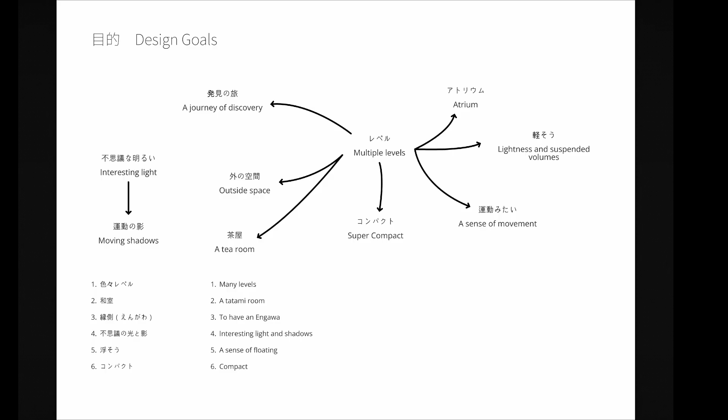As I said before, the atmosphere has a lot to do with light and how shadows dance in the daylight. Particularly, this was a forested site, so I thought it'd be interesting to see how light comes through the tree canopy in the komorebi, and how the movement of trees and leaves would dance shadows and light into the interior.

The narrative of discovery within the architecture is that you would come in and there are three distinct views, similar to Natsumi-chan's house, but in a different order. You would come in and be taken through a series of progressive views to Enoshima Island, Mount Fuji, and then the ocean to the south. As you climb your way up through the building, you would be exposed to these views - they would reveal themselves to you.

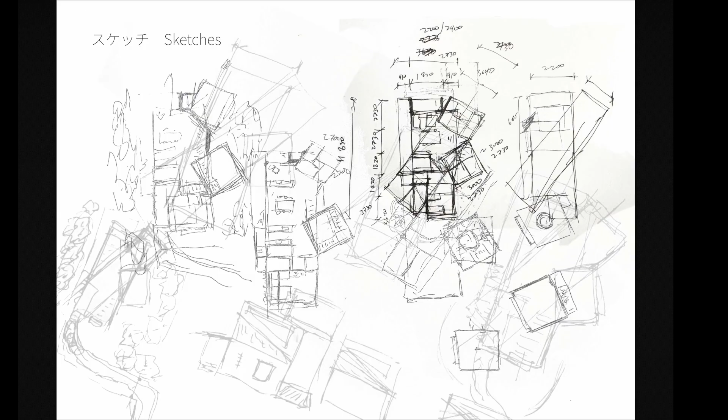So I did a lot of sketching to begin with. I try to start all my projects with hand sketching, both in plan and section, just drawing out ideas. I think I could do a better job at bubble diagramming - I've never really found it useful, and I don't know if it's because I already have an idea in my mind of hierarchy, but I kind of skip that step. I'm not sure if that's good or bad, but a lot of my sketching tends to be specific to plans and sections, and then my imagination handles the 3 dimensions.

So in terms of place, this is again in Enoshima, just south of Tokyo. It is my favorite place in Japan because it is right beside the ocean. You have Enoshima Island, which is a great place to visit, and you have Mount Fuji in the distance, which on a clear day is spectacular.

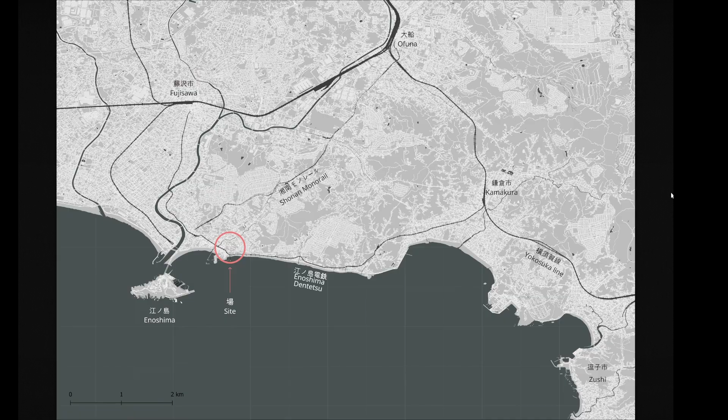So this is the site location. Natsumi-chan's house from the previous video is just down here, right near Enoshima, and along the Enoshima Dentetsu Railway to Kamakura, which is kind of the famous tourist railway, and a great train ride nonetheless.

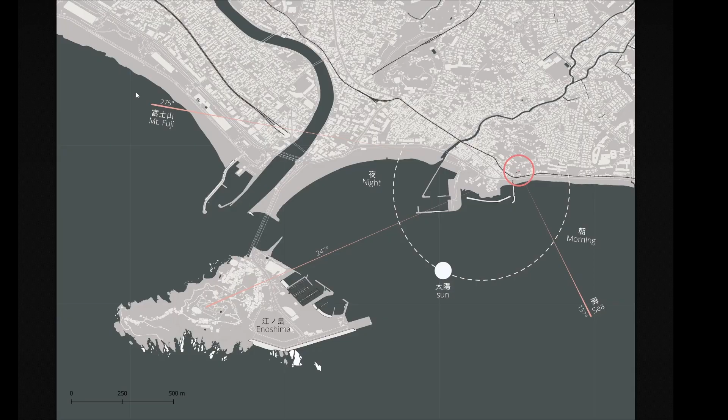From this site, kind of slightly up on the hillside, there are three vectors: one to Enoshima, one slightly up from west to Mount Fuji, and then to the southeast towards the sea.

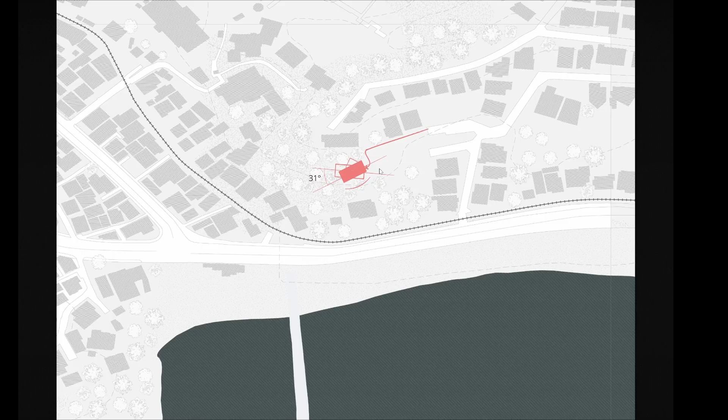This is kind of where the site is. The main road's down here with the railway line, and you go up maybe 40 meters or so from sea level to be on the edge of the hillside. Kind of right here, Natsumi-chan's house in the previous video was there. Enoshima's here, and Mount Fuji is there.

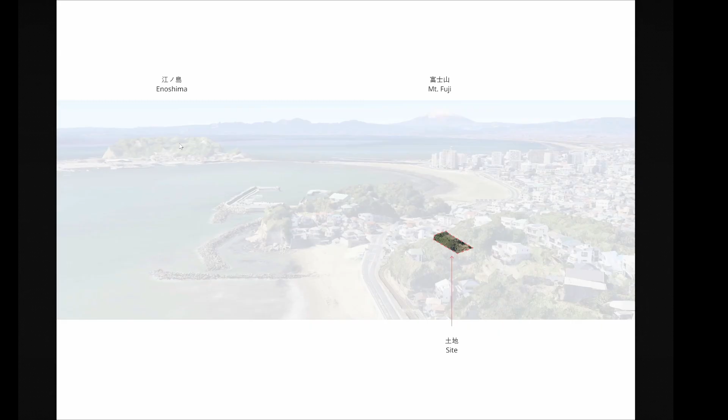Right now it seems like there's an abandoned house there, and so I kind of picked this site as a potentially viable location. There's a bit of a terrace stepping that goes along here, where you terrace up from the beach to the road, and then up to this first house, again up to the property, and then a third time up to a house that's slightly higher up.

In terms of journey, again we're looking at movement and tatamis and different materials, a change in material aspect as you go through the architecture, and how those materials kind of lead you towards the three views.

It's again trying to be a traditional modern Japanese architecture that's quite prevalent, in a post and beam wood structure with the shoji screens, the wood floors, as well as shikui plastered walls.

So into the design. The basis of this design was to have three volumes that intersect each other as they face the axes. So the first axis is towards Enoshima, the second one to Mount Fuji, and then the third one out to the sea.

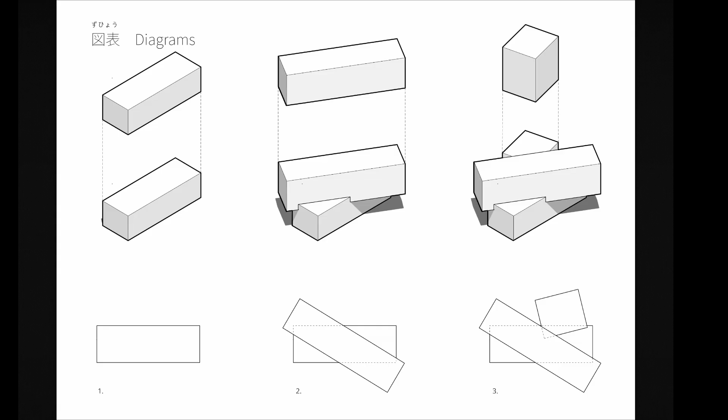The idea was that these three volumes would intersect each other and create a larger contained volume inside, where different levels and different platforms could exist, and create this space where you can move through these volumes, rising in elevation and getting different views out along the axes as you went through the architecture.

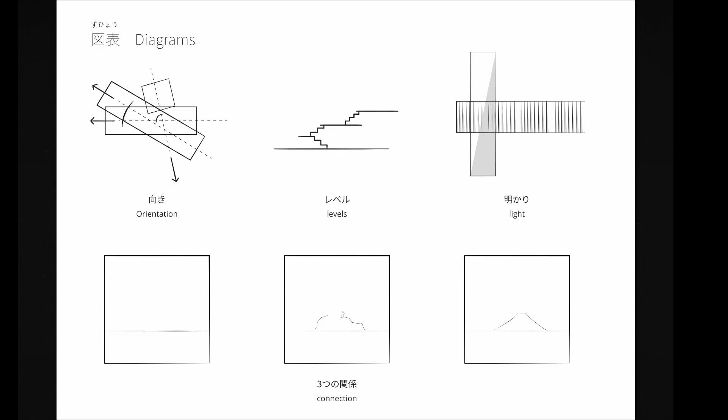So orientation was a big concern of mine, and then how to get those different levels into the design, and then subsequently bring in different types of lighting scenarios to get the connection to the three views, the three framed views.

This is how the plan turned out. From the beginning, I kept that concept of the three rectangular volumes, and just kind of massaged the internal spaces to fit. So you would come up the path from here into the entranceway.

The Genkan is here, and you could go down some steps to a lower bathing, bath, toilet area that also has the closets for the majority of clothes. This is kind of a popular concept in modern Japanese homes, where you put your main closets near the bath, which happens to be near the door.

That means that every time you go to the bathroom to shower, your clothes are right next to you, and that's also where the laundry is. So the changing of clothes and the laundry kind of stay contained within this one area. It's not like you have to go to your room to get your clothes, carry them to the bathroom, shower, and then take your laundry to the laundry room or back to your bedroom to put in the hamper, and then take that to the laundry room. No, it's all kind of contained in one area.

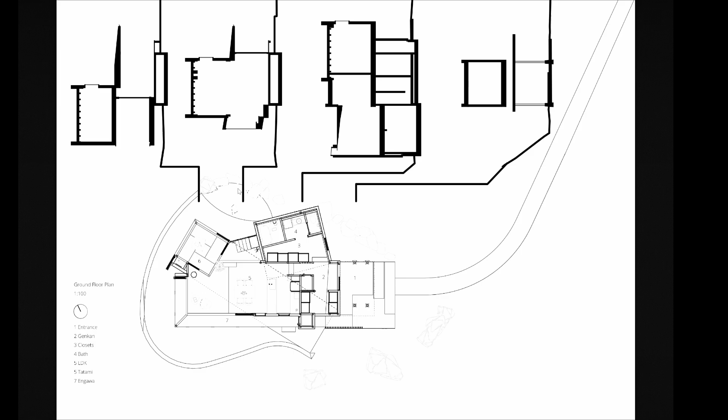If you were to go up some steps, you would go into the next level up, which is the studio. This is kind of the desk space office area that is higher up to look down onto the dining room. So there's still a visual connection, but it's

expanding that LDK volume out along a diagonal is kind of the intention, to expand the sense of space and feel like the building is larger than it actually is. So you have room for 2 desks and some shelves with books, and this was the original treasure box sense of like that's where you would display your souvenirs from your trips or whatnot, or your

things you want to put on display. There's another toilet up here, and then there's 2 bedrooms. A master bedroom with a bit of a deck that looks out towards the opposite direction of Mount Fuji, which ends up being looking out towards the beach and then the ocean, and then another bedroom that has some steps up in it, and then just a small bed and a desk.

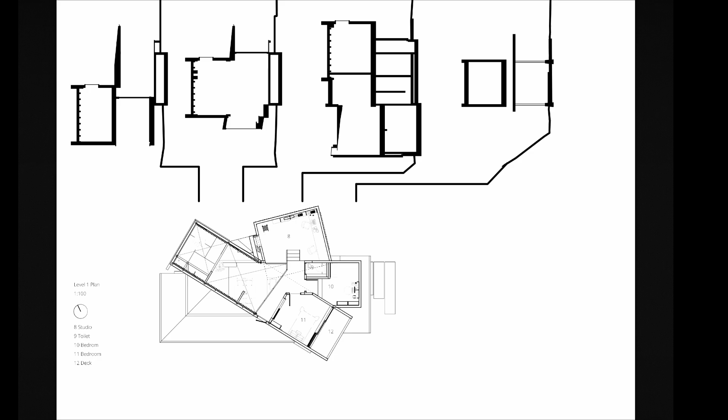Originally, this third volume was supposed to have the high view out to the water. That was the concept, but I couldn't get it into a tower shape, a high enough tower that at the top would have a lookout. I tried really hard, and just in this case, it wasn't really working out for me. And that's kind of where I struggled with this concept, is trying to get yet another level which had a lookout to the water.

So this is kind of a rendering of it in section, where you have the entranceway, some steps up, and you see the living room, dining room, and then a step up to the tatami room, the stairs up to the studio, and then more stairs up to the landing, and then up to the bedroom.

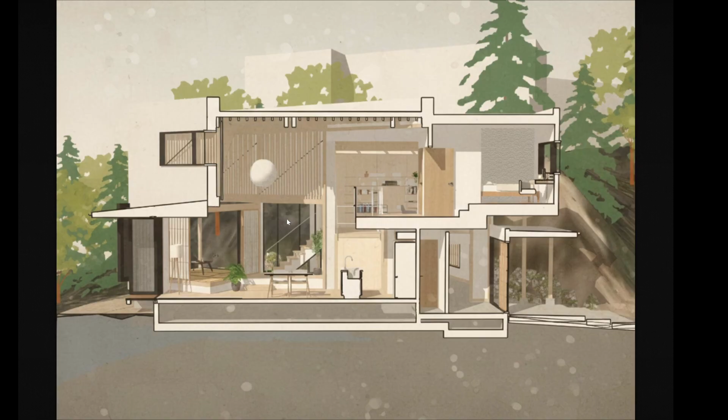The material palette is very typical of Japanese architecture, where we have wood, we have concrete at the base in terms of stone, internal plaster walls, a connection to the ocean, and then shoji screens.

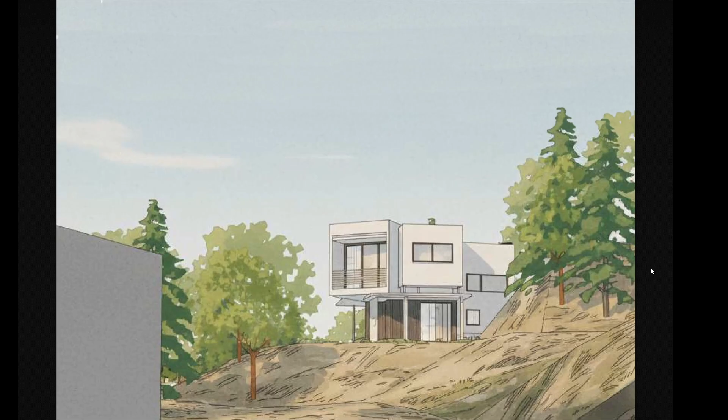These are kind of some graphics. I tried using AI online to render out this project at first, and this is kind of what it gave me, which in some senses does convey the finished product, the finished design.

Site plan, and then floor plan. This floor plan I thought kind of turned out actually quite nice as a graphic.

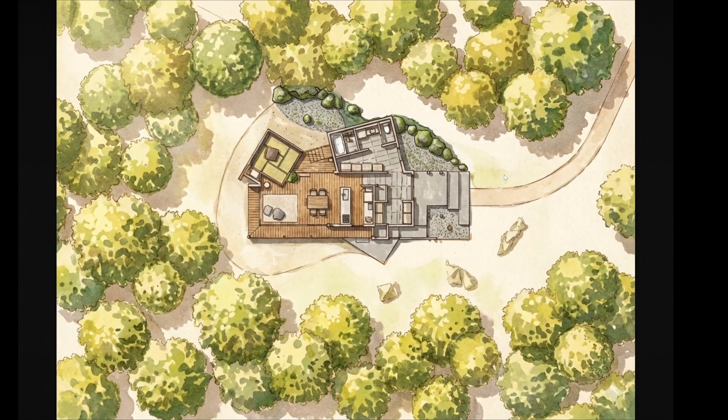In the rendering engine, this is kind of the pathway from the parking area. So you'd park and you'd walk up this hill, and then the building you couldn't really see from the roadway, and then so it would kind of come to you as you go around this corner,

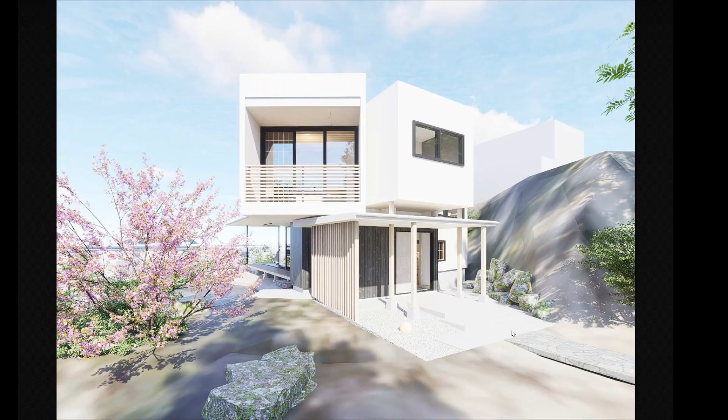and you can see like the idea of floating volumes. So you have the darker wood for the main volume grounded in the earth, and then a floating canopy above which there are these other volumes that are kind of suspended up there.

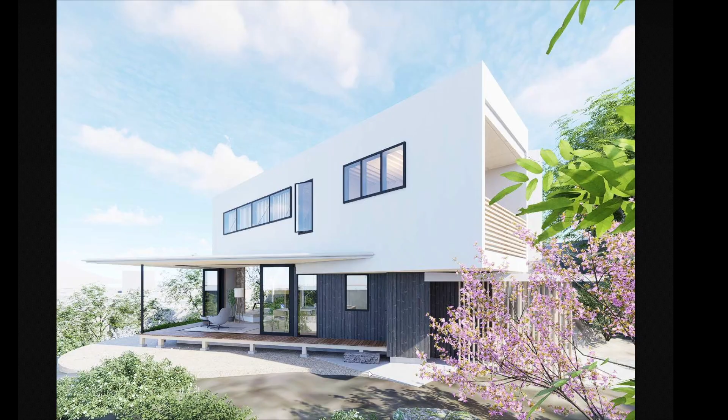As you come around the side, there's some slats here that give a bit of an interesting lighting effect near the doorway, and also make it less obvious that there's a path to come around to the yard, the front, I guess kind of south side yard, the engawa, and the open sliding doors, I guess you'd call them, for the living room.

Originally, I went through quite a few iterations for the facade, and it didn't really turn out the way I wanted. Originally, I was trying to have multiple different facade treatments of different wood facades, because it would be a library of the different facade techniques you could do in Japanese architecture.

But it became a bit too busy, and so I tried to simplify it down and refine it down to a plastered finish, which is in Canada we have stucco. I guess in America you have stucco too, but this is it's kind of a smoother finish than this, and I wanted to try and get some texture in it still, and some patina, but the rendering didn't really come out in the rendering engine.

But the idea was it would be like this kind of off-white Japanese plaster with a bit of texture and patina to it. I probably also should have put like silver aluminum frames on the windows.

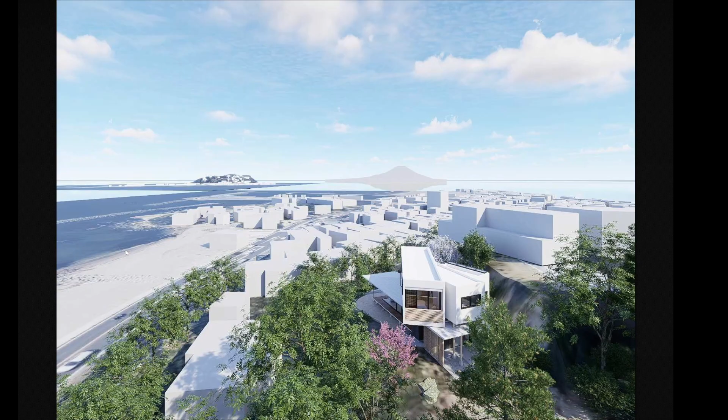In this bird's eye view, you can see how there's this volume that shoots out towards Enoshima, and then this higher up volume that goes towards Mount Fuji, and then there's two other volumes.

This is the bedroom that's actually aligned with the volume below. So in plan, you still get that directional axes. But I found that I felt like I didn't really need the double height above the living room as well. So I was trying to find that compactness.

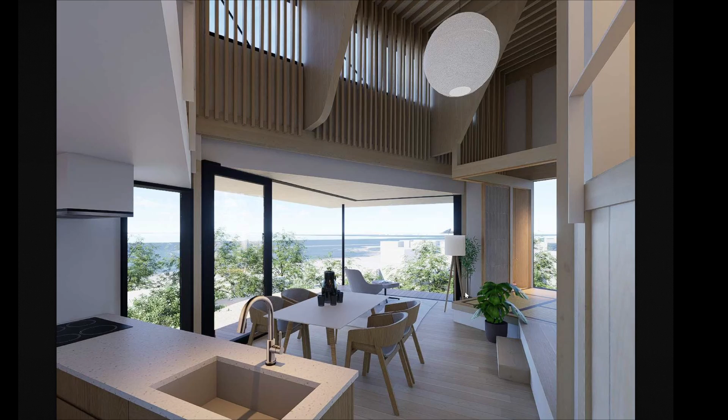This is the view from inside near the kitchen. Kitchen, living, dining, and then the tatami room on the side.

I'm trying out a new rendering engine here as well, D5, and starting to learn how it works a bit.

View from the kitchen area, and here you can see those two views, one to Enoshima and one to Mount Fuji within the tatami room.

And then above is this large atrium volume, double height space, with slats and these modulating fins to help control the sunlight, and make sure that without the overhang on the outside it's not overly bright inside.

I'm not sure how successful they were. I think it's one of those things that really needs study with physical models.

I think the rendering engines kind of can change the way the light comes in, and even with ray tracing, I don't think it really represents the light coming in accurately.

But it was an interesting experiment and something I certainly learned from.

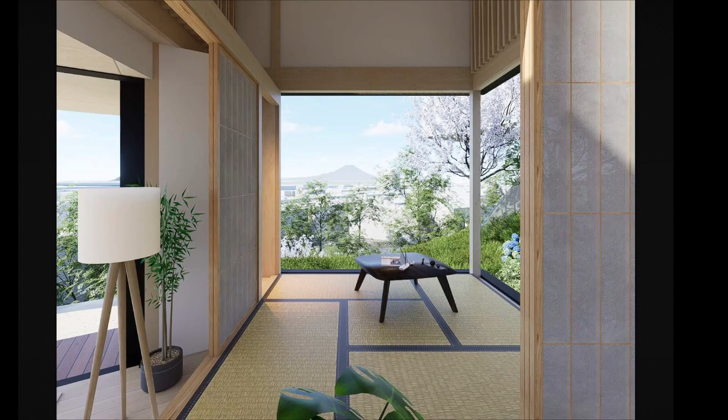The tatami room. And then from the Enoshima side.

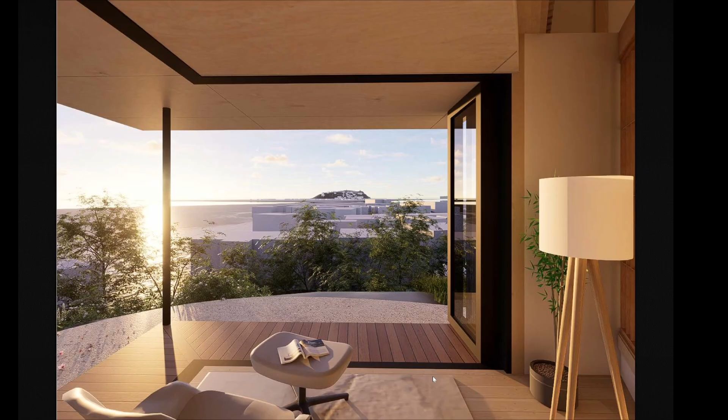And so being up on the hill, you would have this fabulous view of Enoshima and Mount Fuji in the distance, and be just high enough to see over the lower buildings near the water.

And when you turn around, this is kind of in a way the money shot of the project. This was the essence of the project, having multiple levels and that sense of verticality within the house.

And that part was successful, where there's the tatami mat and this kind of sitting ledge, play ledge, and then you go up these stairs and you're at a higher level in the studio, but it's still connected visually and acoustically to the LDK.

And then you have this corridor, this higher up corridor that's kind of like a bridge suspended above into the bedrooms, which are also connected back into the main space.

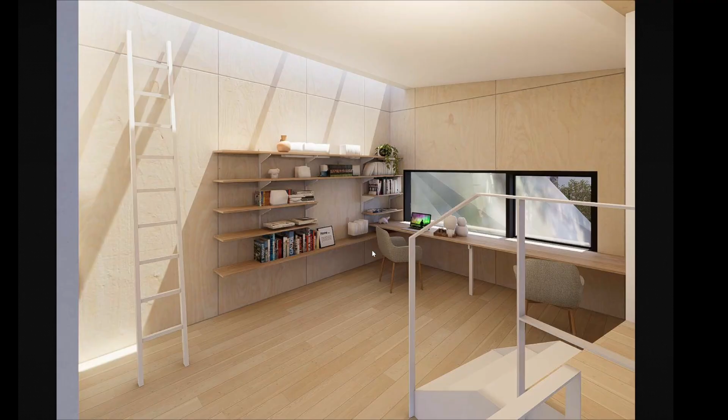Here's how the studio turned out. Again, I was trying to have a loft lookout above that you would climb up a ladder to a net and look out through a slit window to the ocean, and it just didn't feel right, and I ended up with this narrow skylight at the back that would wash the wall instead.

I think it could be refined and looked at some more, but the intention of these projects is that I do them. I have a concept, I have an idea, and I test it out, but I don't want to dwell on it too much, because I want to test it, learn from it, and then move on.

But I don't want to, because it's not like a real project. It's not a commission. I don't need to solve it, and so I just need to learn from it.

I need to learn enough to take my experience into the next project, but I don't need to spend days and weeks and months solving the problem. And so that's why I try to do these fairly fast and not dwell on them too much.

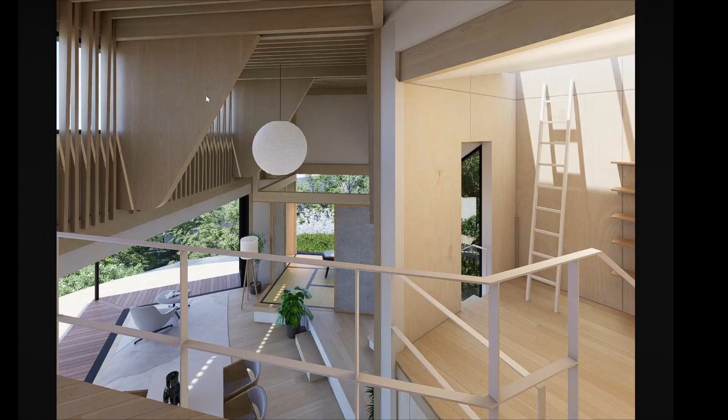And so again, you get this nice double height space where on one hand I really like the softness of the light that comes in here, on the other hand, it still seems a bit unbalanced in light and shadow.

So, yeah, I'm still not convinced on it, but it was an interesting thought experiment, and I think it works better in diagram than in the rendering engine, so I'm not sure how it would feel with physical models.

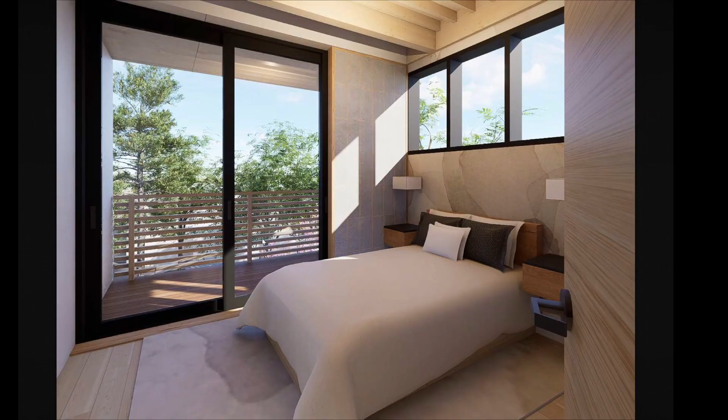And then the master bedroom, some more windows and the deck to the outside, and that's the last shot.

So not entirely happy with the light, or the concept, but happy with having thought up a concept and then tested it out and seeing how it goes. I think the interior volume as this vertical space worked out really well.

I think the compactness of it is fairly successful. I think it still feels large inside, but not overly large. And I like that because it's also not too small. So I think it is a good, comfortable size.

But I think in this case, I need to improve my architecture. I think I need to really hone in on the concept and really spend more time with the massing and the form and the lighting, and not worry about the materials or the rendering as much.

I mean, I didn't really put much time into the rendering, and a lot of Japanese architecture is based on atmosphere, which comes both from lighting, but also a big part of it is also the materials and the texture of the materials. And so that's kind of why I generally emphasize the materials.